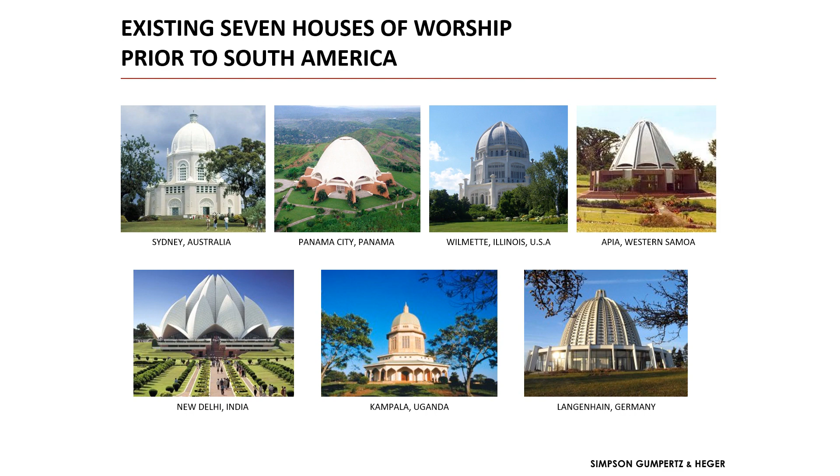You'll see some similarities. There are some design rules, if you will, largely around the fact that every temple needs to have 9 elements in its dome. The number 9 is very important to the Baha'i religion. I've heard numerous inconsistent stories about why, but let's just understand that 9 is very important. So all of the temples need to be dome-shaped at the center and have 9 elements around their circumference.

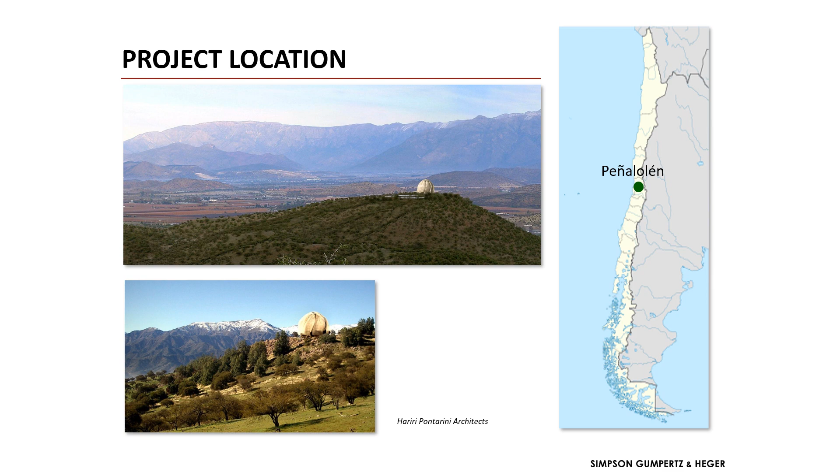This project is located outside the city of Santiago in a town called Peñalolén that is in the foothills of the Andes Mountains. There you see an early rendering of the project - a very challenging site. This is where the project and the story gets rather intriguing. The architect for this project, who was our client, is a firm out of Toronto called Hariri Pontarini.

They've grown since the notoriety from this project, but they were a relatively small firm when we started working with them in 2006. They're very academically oriented. Siamak Hariri, the principal designer, who leads Hariri Pontarini, is in fact a Baha'i.

There was an international design competition for this, 135 entries from over 80 countries. Siamak Hariri tells a really interesting story about the development of this. He wasn't even planning to put in a bid for the competition, but some of his fellow Baha'i and some of his friends urged him to put something in, and it was almost last minute that he decided to enter.

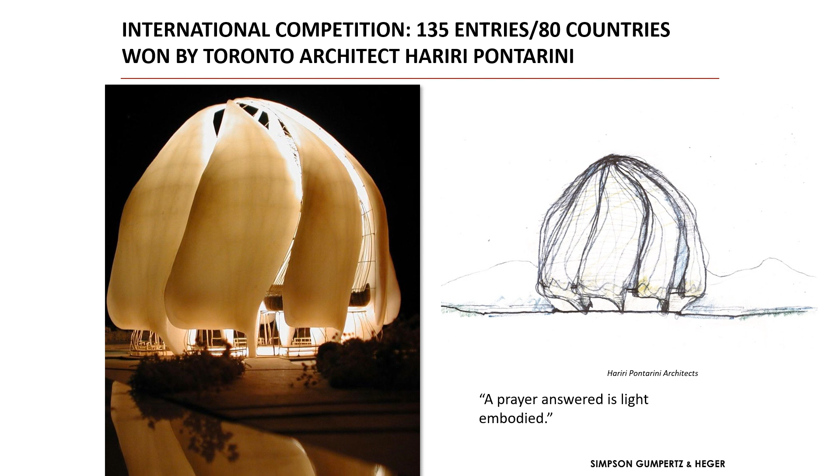But he came to us and asked if we could help, and I will tell you what that story was. The Baha'i do not, I understand,

celebrate in ordinary services like many of us may be familiar with, but gather in temples to pray together. Is that accurate also? Reasonably so? Okay, feel free to correct me anyway - I certainly don't want to misrepresent anything.

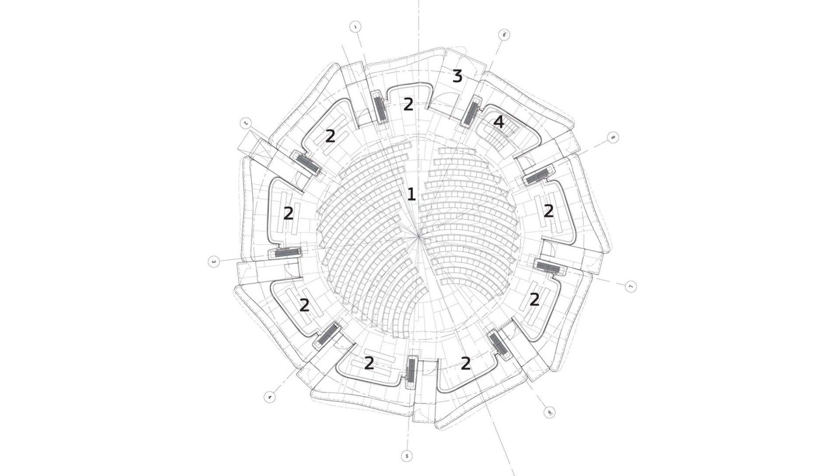This is actually a fairly intimate temple. It has seating for about 500 people. Its dimensions are about 33 meters across and an equal amount in height, if you will. And there you see the seating layout.

This was the project team. Again, the architect, Hariri Pontarini from Toronto, ourselves, Simpson Gumpertz and Heger. We have several offices and actually did work out of several of them on this, but primarily the work was done in Boston, where I work. Halcrow Yolles, who went through a transition and eventually was acquired by EXP over the course of this project, from Toronto - they were the structural engineer at the beginning of the project who worked with Hariri Pontarini.

Patricio Bertholet is from Santiago, an academic structural engineer, and his role was to ensure and convince the local authorities that while what we were doing was not strictly in line with the prescription of the code, it was there in terms of the intent of the code. So he helped us conform with local practice and convince the local authorities that we were on solid ground.

Eventually, as I will describe, the project was tendered to Gartner Steel and Glass, and Josef Gartner, a division of Gartner Steel and Glass, did a lot of the final design and engineering calculations. So there were four, at various times, structural engineers involved in the project.

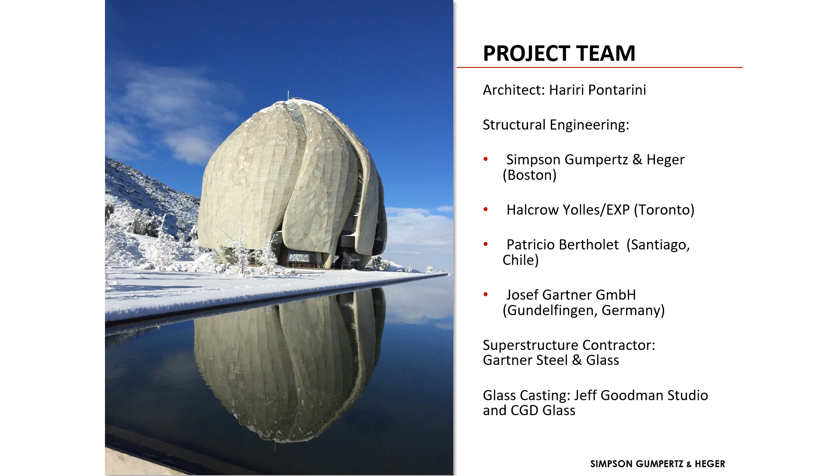This unusual glass, the cladding you see on the outside, is an unusual borosilicate glass that was actually developed for this project by an entity in Toronto - an artistic studio, Jeff Goodman's Studio, with fabrication by a Toronto group called CGD Glass.

Here is a schematic of the structure itself. You can see it has this spiral orientation. There are nine, remember, space trusses that we call petals, in a very organic motif here.

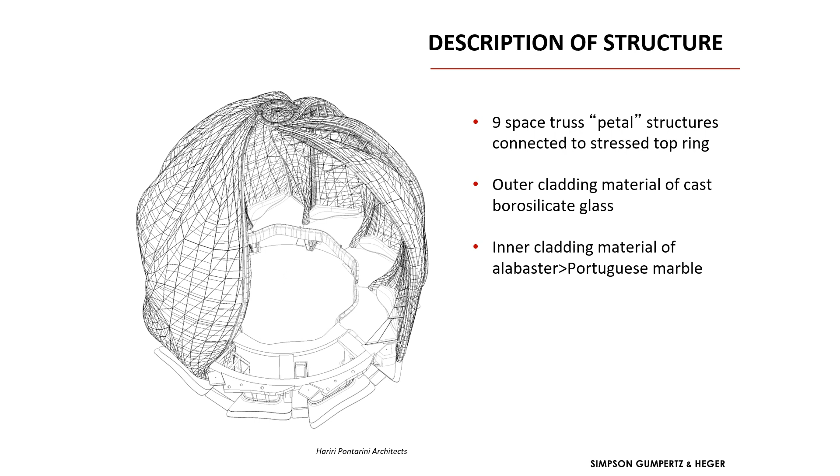These are clad on the outside with borosilicate glass, and on the inside with a thin stone, which started as alabaster and eventually became Portuguese marble over the course of the project - I'll describe that. I'm going to back up a bit because I meant to talk about the architect's vision. The primary vision that Siamak Hariri was going for was that this was to be a temple of light.

And the light was to be the inspiration for the project. You can see even from this physical model here, lit interiorly, that it has this warm, glowing feeling, if you will. This was really important to him. Similarly, during the daytime, the sunlight would also permeate and give a warm splendor glow on the inside. So the cladding material and the use of light, this semi-translucent material, was really important.

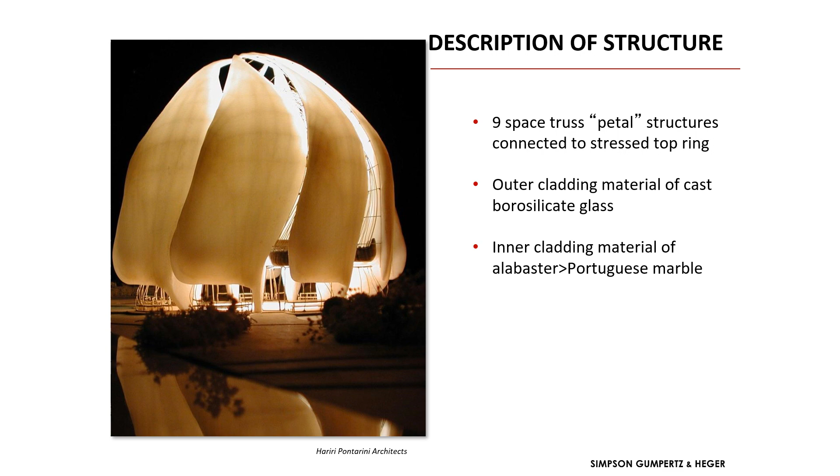The selection of the stone and the selection of the particular glass were critical to Siamak's vision. Siamak also wanted for the temple to have an organic quality, and the petals are meant to evoke petals of a flower or a tree. You can even see here, more so in the finished structure, part of the structure expressed through the petals, meant to evoke veins of a leaf. These were important aesthetic considerations.

These were some of the design challenges that the whole team faced here. You've seen it's a very complex structure. Each one of those 9 petals is identical, but within them there are hundreds and even thousands of individual elements. Every strut, every structural element, every piece of glass, every piece of stone within a leaf is different geometry. Very little repetition, no repetition within the leaves themselves.

The architect wanted very high precision in the fit-out. The joints between the glass and stone elements had to be quite narrow, and of a consistent dimension. The materials had to appear to be, and in fact need to be, a very high quality material.

One of the big design challenges from a structural point of view is that the project site is in an area of very high seismic demand. If you're familiar with seismicity at all, the zero period acceleration, which has a 10% in 50-year chance of occurrence, is 0.41 G. We relate that in the United States to California levels of seismicity. So this is a very high seismic zone.

The alabaster that the architect had chosen really had no track record in a thin cladding application. It had rather variable strength, and some veining in it, beautiful, but the veining produced variable structural properties. There are no industry standard specifications for designing in alabaster as you might find for granite, marble, or more traditional thin stone applications. To compound all of that, the structural properties of alabaster can degrade under high temperature or high levels of moisture, particularly under prolonged combinations of both. So not an ideal material, but the architect was absolutely in love with it.

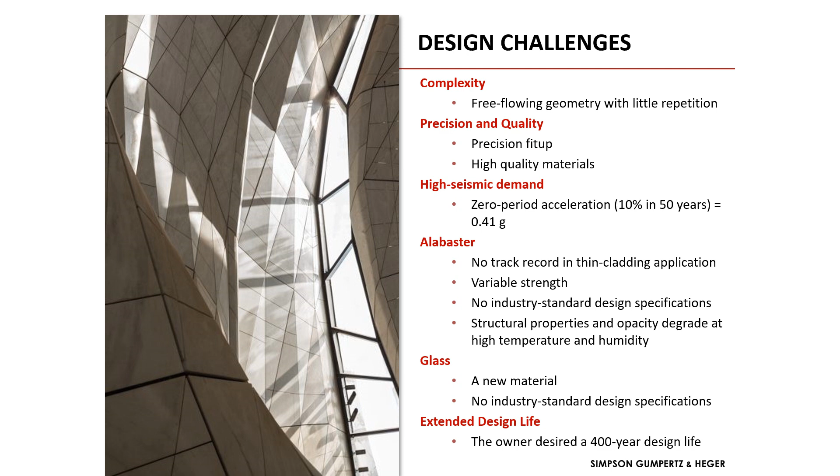I went to school on the West Coast to learn seismic engineering, which is probably why I got drawn into this project, even though I work and live on the East Coast today. And this project is attempting to do everything my professors in college told us not to do. Heavy, brittle materials in a high seismic zone are known to be a no-no. So how do we make this work, help the architect meet his design vision, and really do it in a responsibly safe and reliable way? That was the major challenge for structural engineering on this.

A little bit more on the skin and cladding. The outer glass is 32 millimeters thick. It's made of borosilicate glass, which is Pyrex — the stuff we make beakers and test tubes out of. Pyrex is actually extremely strong in its purest form, stronger than ordinary soda lime float glass, but it's expensive.

But to get the texture and appearance the architect was looking for, this glass was made by taking nodules of Pyrex — think of a piece of Pyrex maybe the size of your finger or thumb — broken up and put in a mold in an oven, heated up, then fused together, melted and fused together, but fused in a way that you could see the fusion lines. This was the texture the architect was going for. I've described the alabaster.

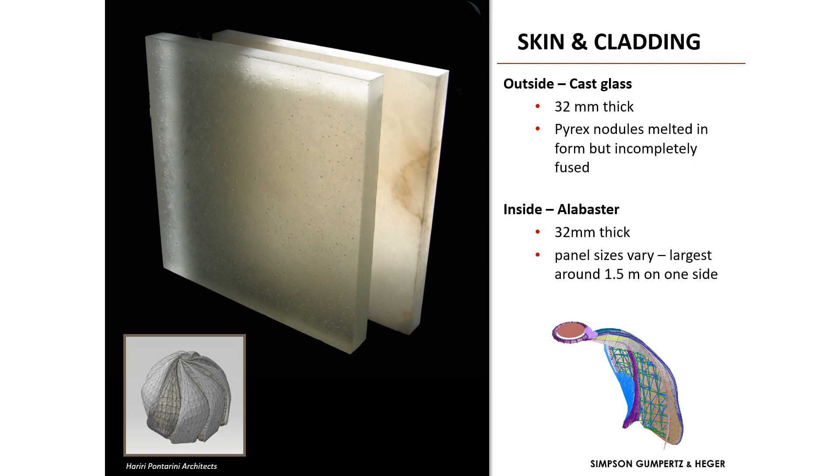That also is to be 32 millimeters thick. The panel sizes vary, but the largest are around 1.5 meters on one side, mostly triangular and trapezoidal shapes.

I talked about the alabaster and its qualities and its challenges, if you will. Mostly we were concerned about degradation over high temperatures and high levels of humidity, and what we could do about that.

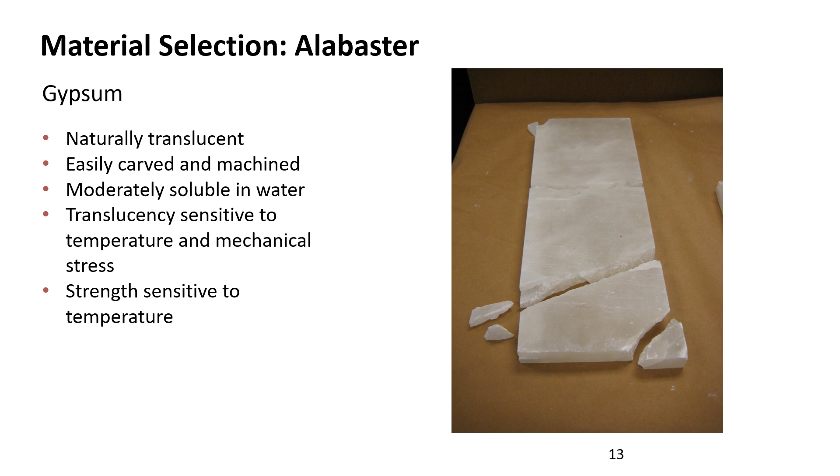One of the reasons we were awarded this structure is that our firm, Simpson, Gumpertz & Heger, has some unusual capabilities for a structural engineering firm, one of which is that we have a very extensive structural and material test lab.

So we were able to bring these new or unusual materials, the alabaster and the glass, into our laboratory, apply a lot of torture testing that we invented for that purpose, and understand the structural properties and durability of these materials. So you see here some testing of the alabaster.

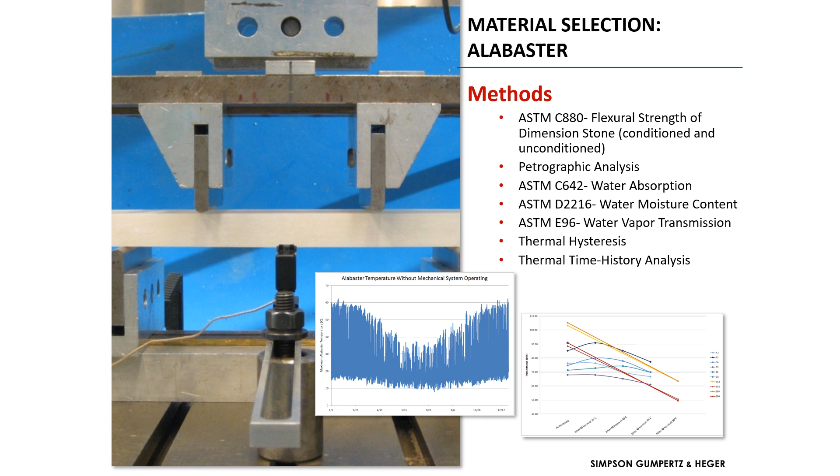And it meant, in effect—in some measure it's a slight exaggeration to say—they had to keep the air conditioning on all the time in order for the stone not to degrade. That was proven to be impractical. I'll return to that in a moment.

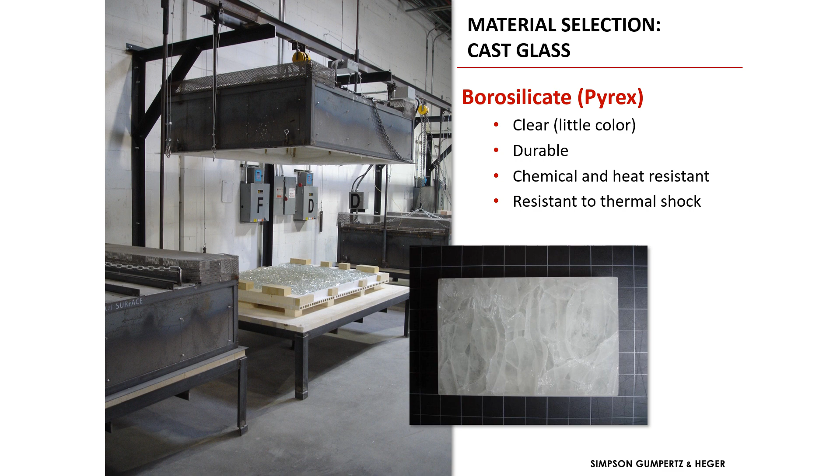Here is the borosilicate glass. You can see the broken elements going into the oven, and you can get a sense for the texture in the lower right figure, which is exactly what the architect was going for.

What we were most concerned about with the borosilicate glass was not its inherent strength or the reliability of the basic material, but how good and durable and strong the fusion lines would be between the various nodules. So we used some industry standard tests and made up some more that were even more severe, to see if we could degrade those bond lines through freeze-thaw or thermal shocking.

The bottom line is that the material was extremely tough. We couldn't damage it at all, short of really dropping it off the top of the Empire State Building or something. It turned out to be very strong.

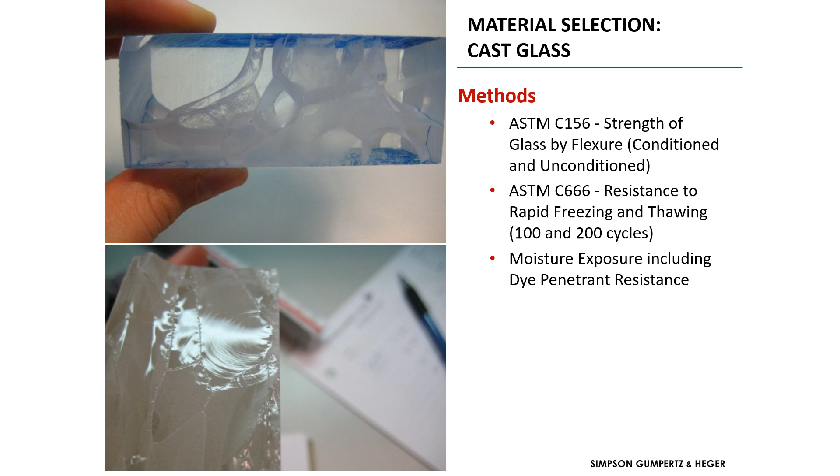The base isolation was used—I'm seeing some nodding heads here. We used friction pendulum isolators in the horizontal direction. We didn't isolate for vertical. This was about 10 years ago, so vertical isolation was not as prominent as it is today. But we achieved very good isolation in the horizontal direction.

So it turns out that the vertical accelerations—and there were significant vertical accelerations because we're fairly near source here—wound up dominating the design.

And the interesting part of the structural behavior when we did the dynamic analysis is because of the spiral geometry, when you accelerate the structure up and down, you actually get this twisting effect.

Did you ever have Jiffy Pop popcorn over here? No. This is a U.S. thing. All right, sorry, it won't mean anything to you. I won't even go there, it's too long an explanation. I can do it over Q&A if you want to.

We said it behaved like a Jiffy Pop popcorn popper as it went up and down and spiraled, if you will. So we got not only vertical accelerations, but lateral from the vertical acceleration.

So the structure is built on a concrete podium, and you'll see some of that in construction later. And just at the level of the base isolators there is the top—think of a round open-top table with base isolators on it. And then those structural leaves are sitting on top of the base isolators.

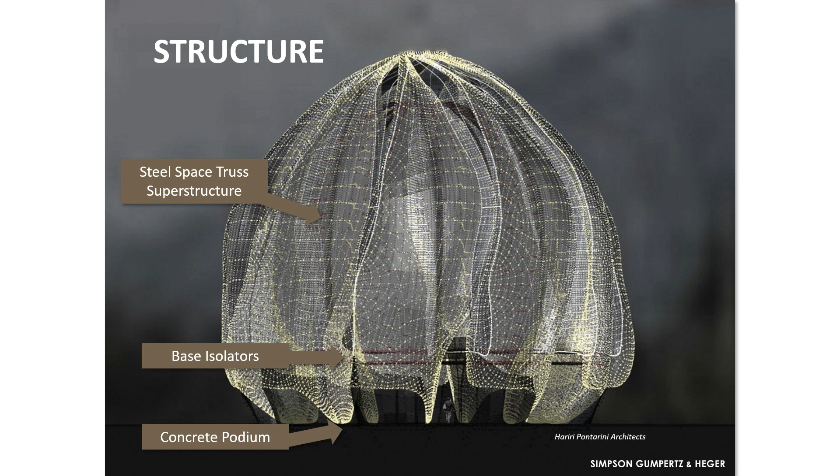Because we had really no design standards for the alabaster or the glass, we couldn't go back to sort of classic prescriptive design where we're working with characteristic strengths and factors of safety.

And we have all of these pieces of stone and glass overhead. We were very concerned about falling potential. And so we went back to first principles of performance-based design, which I think is more common in the US for seismic design now than it is in other parts of the world. But in the US, performance-based seismic design was really developing as we were going through this, and we had people who were involved in that development of that approach to engineering.

Basically, in performance-based design, you're choosing target levels of performance and target levels of reliability. So you're looking at the variability of load and resistance and the probability of failure being where those two overlap. So we took all of our laboratory testing to understand the variability in load and the resistance. We have a lot of data from industry about the variability of the seismic loads, for example.

And we adopted, based on then-developing measures, criteria for performance-based seismic design—a criterion that there should be no more than a 10% probability of failure of any single panel, that any single panel would drop under an earthquake with a 10% probability under the design level event. That was our goal. Anything more than that would be unacceptable in terms of risk to life.

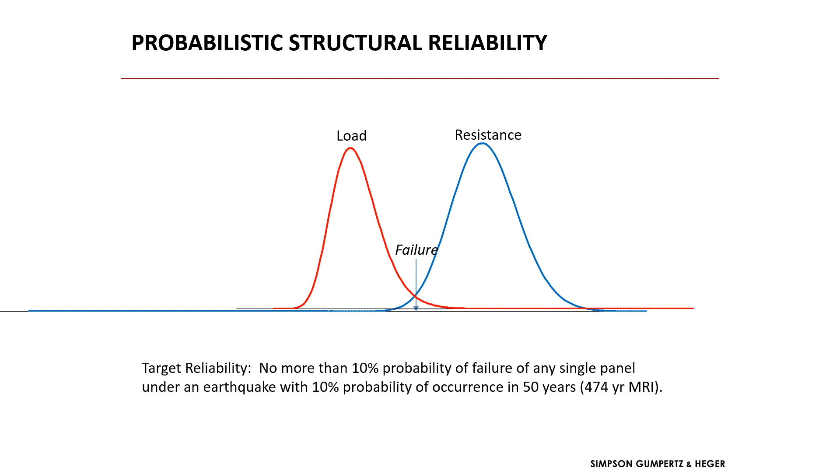And we went through a lot of analysis, and this was a tremendous amount of number crunching where we actually calculated the probability of failure under the seismic events of every piece of stone and glass and element in the structure—thousands and thousands. So we're writing scripts and crunching gigabytes and gigabytes of data to do this calculation. And this just shows a piece of the spreadsheet that shows the output.

The really interesting and satisfying thing as we did all of the calculations was something really interesting came out of this as a design tool. The original calculations that we had for stone and glass failure turned out to be over our limit of reliability—that is, we weren't beating our target.

But we were able to go into the structure because we had the probability of failure calculated for every piece of glass and stone. We could see what parts of the structure were contributing overly to the probability of failure, and say we've got a problem with that part of the structure, we need to take care of it.

So most of this involved looking at parts of the structure that were vibrating or accelerating too much, going back to the architect and saying we need to make some changes to stiffen up the leaf in this area and that area in order to bring the accelerations into line, because there was a really small percentage of elements leading disproportionately to the probability of failure. So it was a really interesting design tool from that perspective.

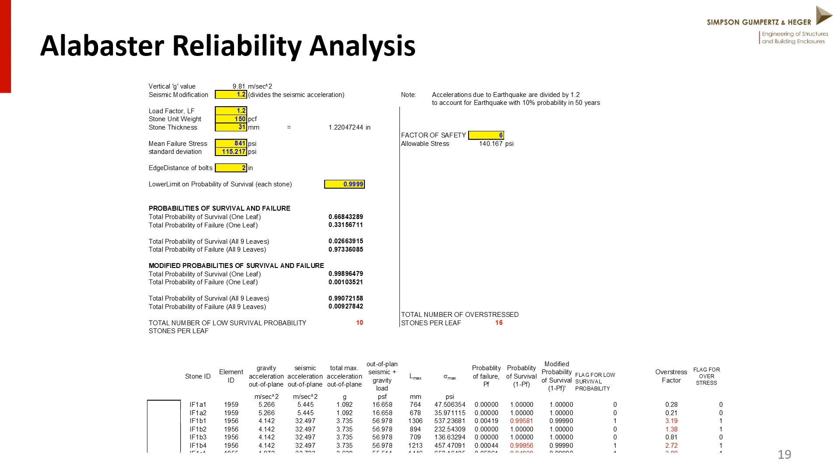Once we did all of that, our back check was to go back and see what are the inherent safety factors we're dealing with in the most highly stressed structures. Most of the stone and glass elements came in the range of 3 to 6, which is actually pretty reasonable for most masonry elements. So we took some measure of satisfaction from that.

But in the end, we needed to move away from the alabaster, and there were several reasons for that. The dominant one was that having the air conditioning on all the time was just not sustainable or reasonable. We were looking at backup systems, what would happen if the air conditioning went down for 48 hours. As we went through this project—remember we started in 2006 with the engineering—the imperative for sustainability was growing. It was becoming very important to the owner, and eventually it became impractical.

The other problems with the alabaster were that Santiago actually has a relatively aggressive environment. There's a lot of smoke and air pollution there, which we thought would require a lot of cleaning for the alabaster. To do that with a stone that's relatively soluble is not very practical. And also there was a limited quarry capacity for this particular stone.

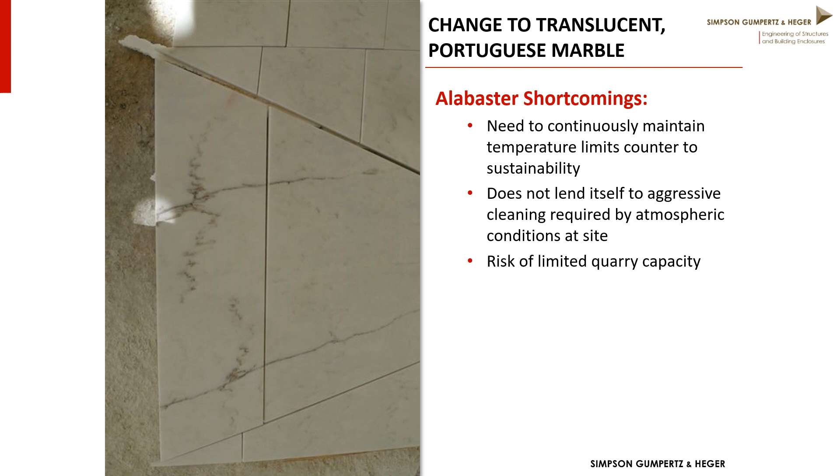So with all of these piling up, between the structural engineer beating up on the architect on one side and the owner beating up on the other because of the sustainability problems, the architect had to surrender his desire for the alabaster. We were able to find a Portuguese marble that was very close in appearance and didn't have all of those problems. So we did another series of testing, reran the reliability calculations for the Portuguese marble, and made that change.

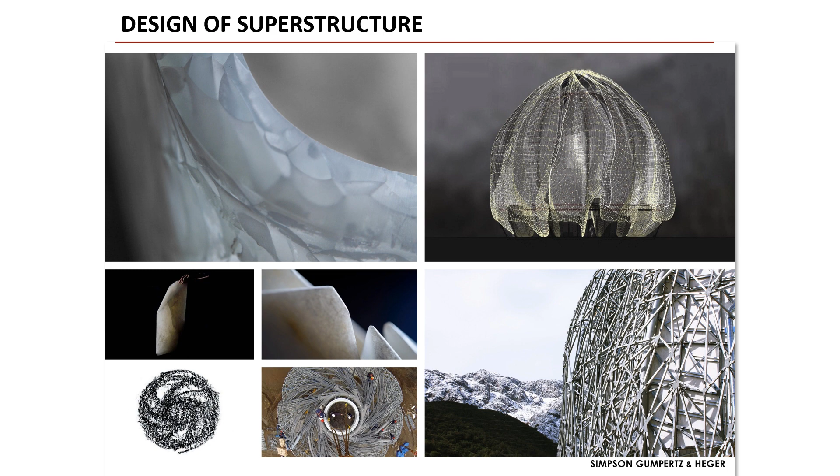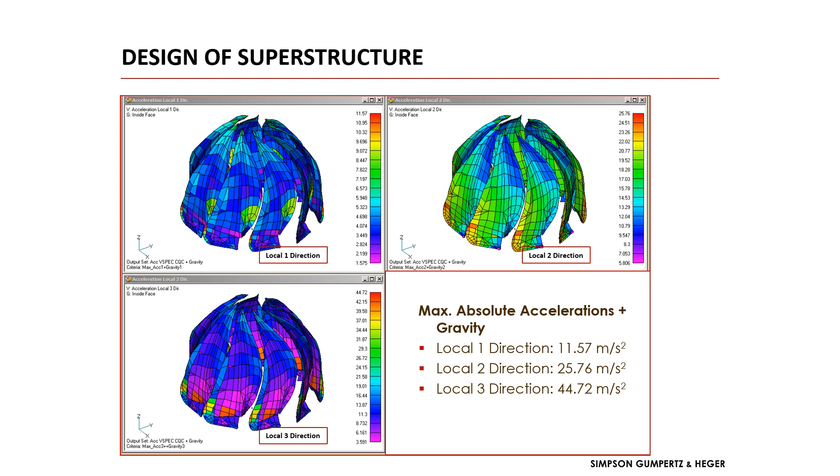We were able to bring in people we've worked with on different types of structures. We have a group in our engineering mechanics division at SGH that does a lot of work on structures like this—very precision, generally scientific and defense radio telescopes and radar antennas. Although the structure doesn't look a lot like the Baha'i structure, the analytical techniques are very similar and translate over. So we brought those folks in to help us with this.

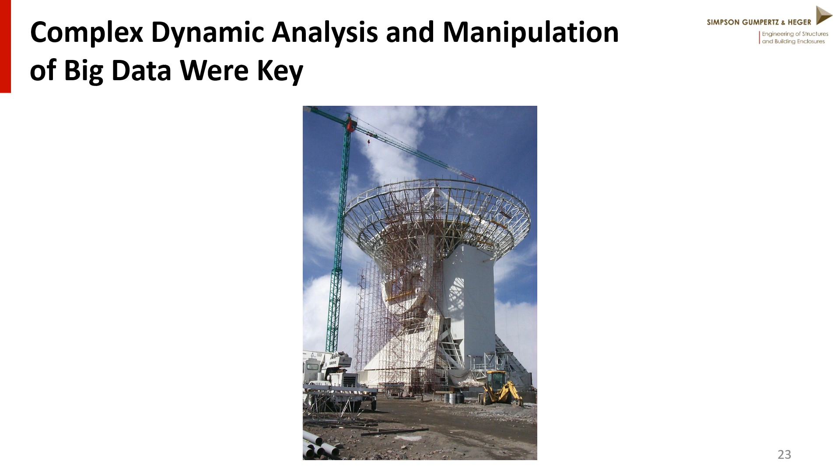We also had to do a lot of work with tolerances and movements between different panels because we had very tight joints. There are no expansion joints anywhere in the facade, so we had to have facilities to take up all of the structural movements between each piece of stone and each piece of glass. We calculated the gap changes during all of the structural movements as well.

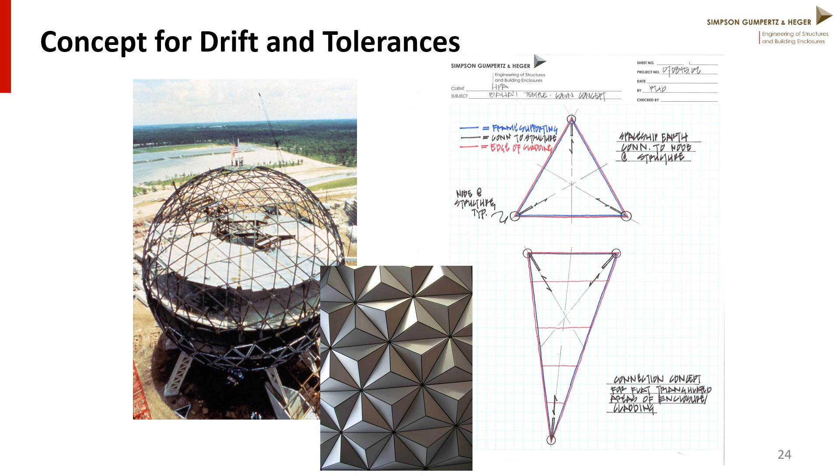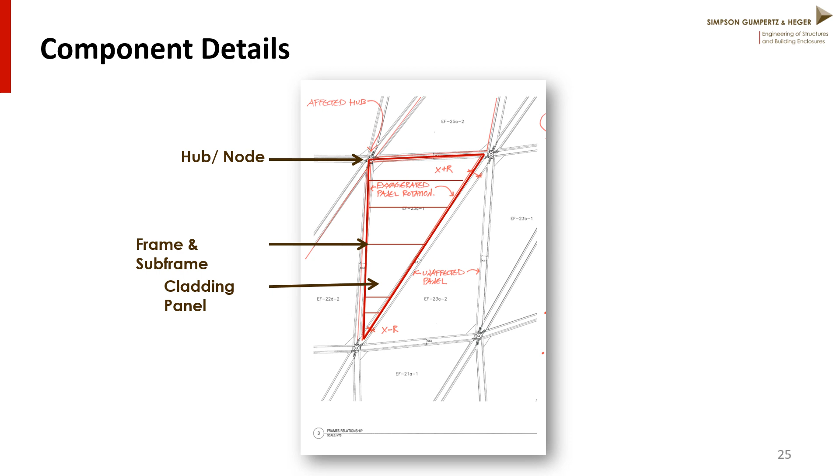So to go into a little more detail here, the basic geometry of the panels for the stone and glass matched the geometry of the underlying structure. We had a structural frame, and then subframes with components for glass and stone that mounted either on the outside or the inside of the structural frame.

This again is just the analyses for drift tolerances. We had to figure out how to mount these panels so they could move but weren't overly constrained. There's a lot of detail here I won't have the opportunity to really go into, but we used different techniques to support the panels in a statically determinate fashion while still allowing them to be stable.

Let me see if I can get the pointer going here—yes. This is an alignment tab that comes out from the base of the structure, and we have adjustable screw stops on each side that could limit the movement of the joint from side to side. So you're adjusting the permissible movement and the position of the gap between panels by adjusting these screws.

And then in terms of fixity along the direction of one of the frames, we had a similar kind of arrangement with screw adjusters that would back up against a stop here.

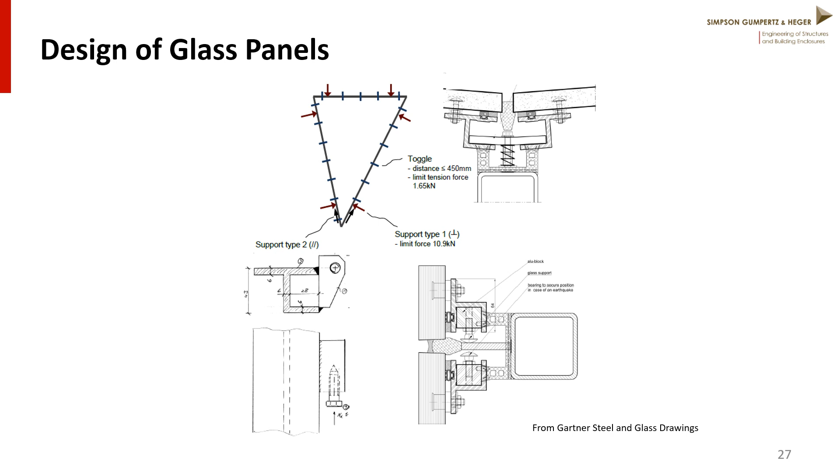So we were able to align in the field the position, and there were different alignment techniques depending on where you were on the structure and how the gravity load and other loads were being carried.

We're going into some of the design. Here are the design of the glass panels. This just shows you the glass with an aluminum subframe, and these are some of those lateral screw stops that allow for the joint alignment. This is one of the stops that these go against.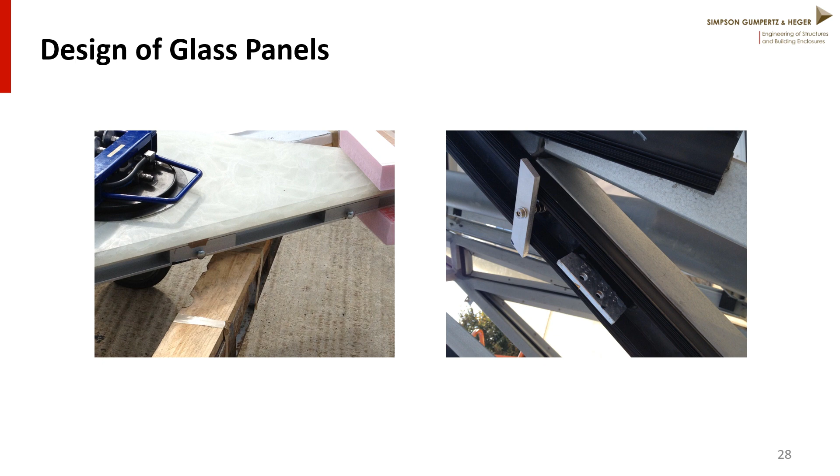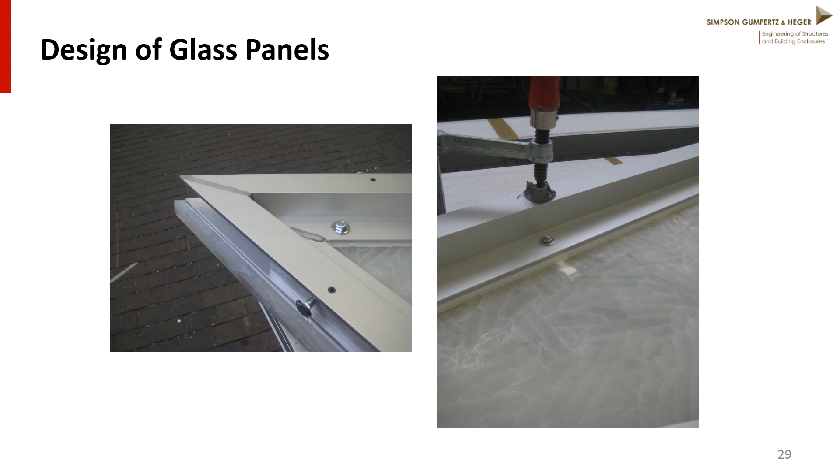Here you see the underside. All of the glass panels and the stone panels were fabricated in Europe and sent over.

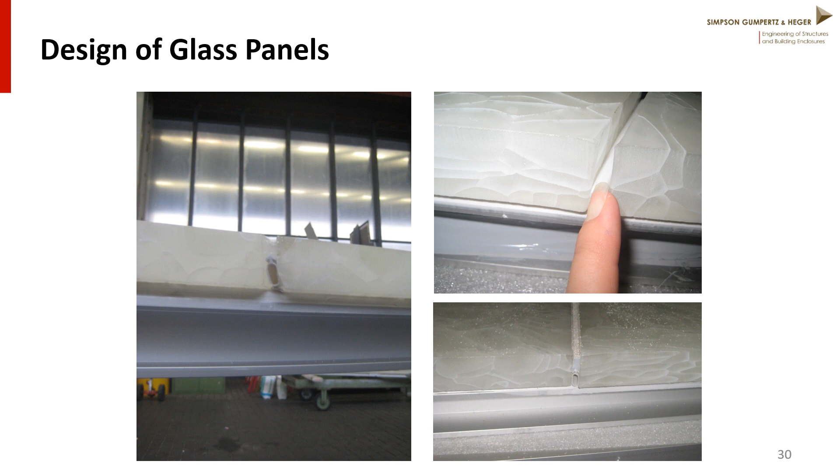More details here showing some of the waterproofing details. All of the waterproofing joints had backup associated with them.

This one detail here, I don't think you can really understand all the details from the back of the room, but we spent more time on this one detail than any detail in the project. Literally hundreds and hundreds of hours went into this, because what we're showing here is the relationship and the attachment of the basic structural frame, which is this tubular element down here, attaching the glass on the outside.

So here we have the demands of the structural capacity, adjustment for tolerances, and keeping a weather enclosure at the same time. On top of all of that, the architect would not permit the appearance of a fastener on the outside, so we had to come up with some kind of blind fastening system. We had all of these conflicting demands, and how do you solve that?

One thing we decided on early, in terms of sequencing, is that the stone panels would go on from the inside first, and they could be back fastened by application from the outside. But the real challenge was putting the glass panels on in a way where no fasteners would appear, while at the same time having waterproof joints between the panels and being able to adjust for all of these tolerances.

So some of the elements here that you see - you start with the structural frame. This U-shaped element is a rubber-shaped gutter, which is a water management channel, if you will, that will take backup water in the event that the primary seal between the panel fails. That water can be collected in this gutter, and there's a network of joinery in these gutters that take the water on the outside.

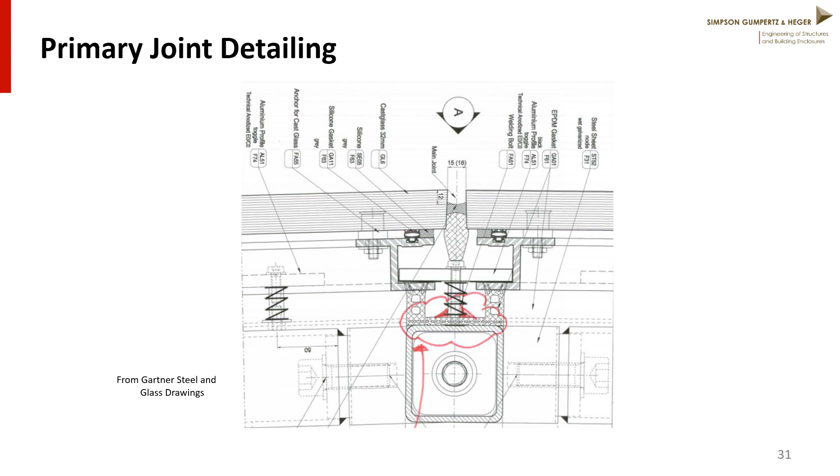So it's all blind fastening done from the outside, and you need to clamp it a certain amount so that you compress this gasket system, but not over-compress it. Anyway, that's the short version of the explanation of this complicated joint. More engineering went into this than any part of the project, but it works.

So I'm going to go to some construction here. We're looking at the same sort of detail. This black here is the U-shaped neoprene gutter system, and these are the toggle bars that I just mentioned. Probably a lot easier to understand from this view - you see they're aligned along the axis, ready to accept panels.

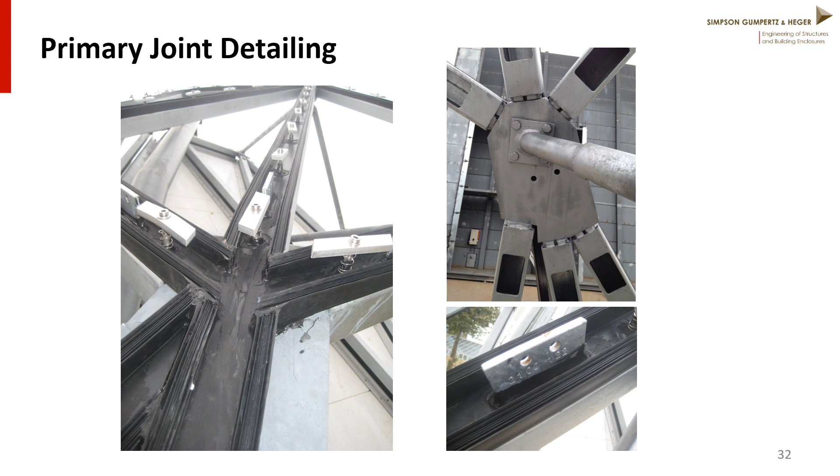Now it comes to who's going to build this thing. This is really a challenge because it's a very, very high precision structure in an area where generally the degree of sophistication in the construction labor is not that high, and an owner who wants a very high degree of reliability. There was an imperative on the owner's side to be able to use local labor in the construction, even though we recognized they couldn't do all of it.

So we went on a search for the owner and determined that there were probably 3 or 4 contractors in the world that we really felt with a high degree of reliability could put this project together. I won't mention who the other ones are, but after a lot of interviewing, we settled on Gartner in Germany. You may know them. They're a subsidiary of Permasteelisa.

They've done a lot of really fancy cladding work, excellent engineering and quality control. After a lot of negotiation, Gartner was selected for the project. We did agree that the delivery system would be basically design-build. That is, we would tender the design over to them, but they had to do the final design calculations and take complete integrated responsibility for the design and construction of the structure. And that worked very well.

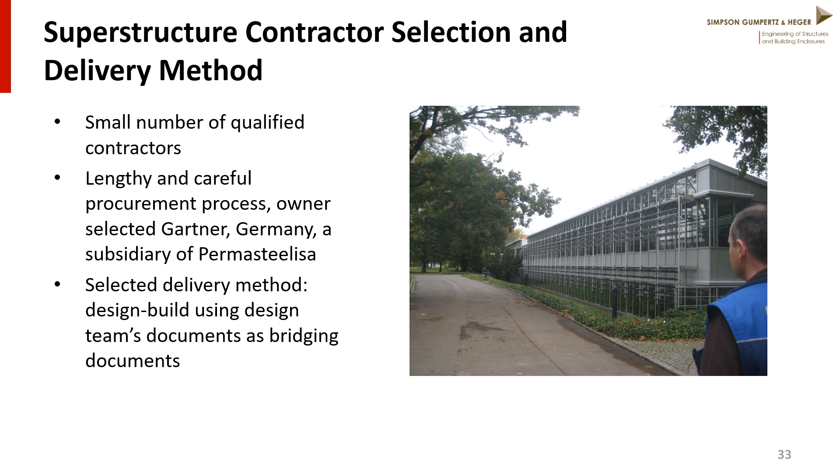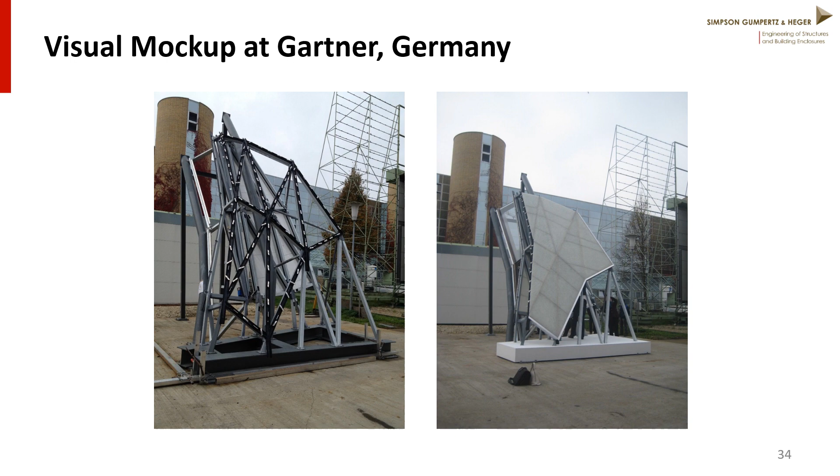Here we're doing a mock-up, a visual mock-up at Gartner's plant in Germany. This is the largest water testing facility I've ever seen. What you're seeing here is a very large mock-up of the panel system, and this grillage is a bunch of spray racks that we used for testing. We actually breached or cut the primary seal in the water testing to make sure that the backup seal was reliable enough to do the job.

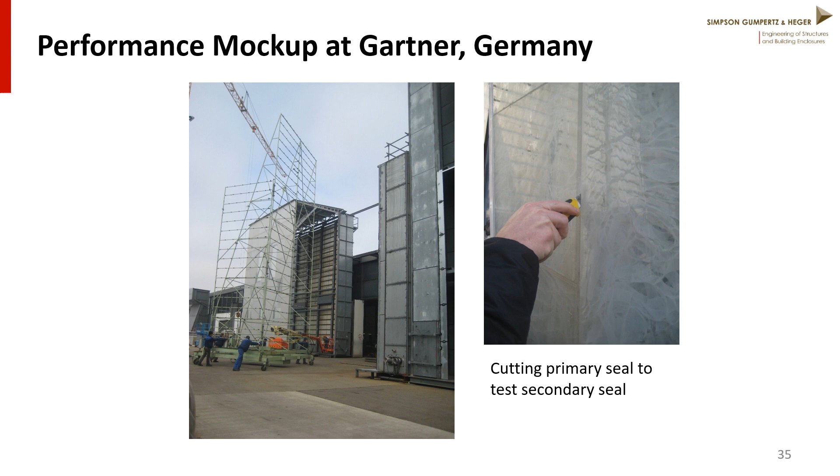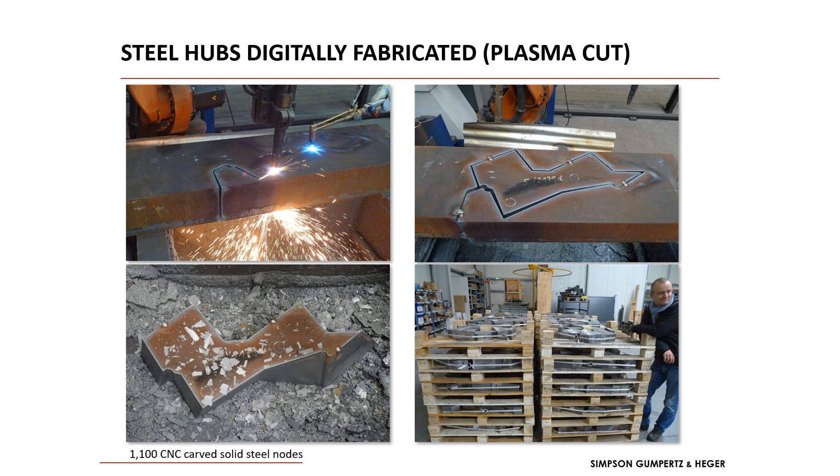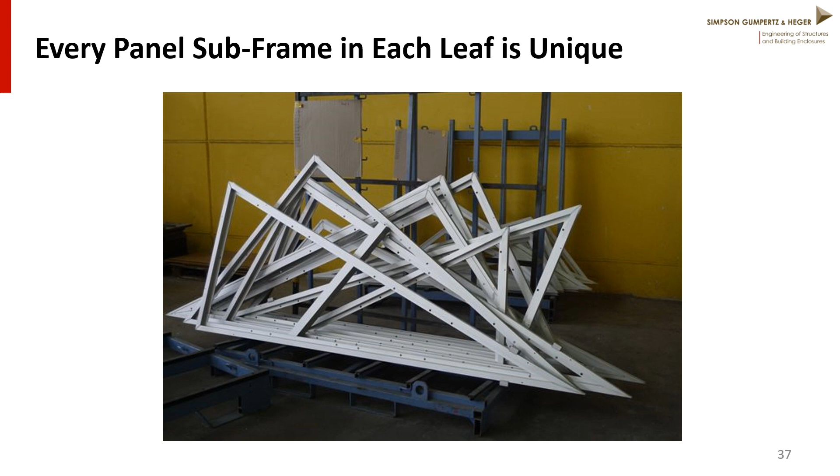Every component of the structure was digitally fabricated. These are plasma cut steel nodes for the joints. Every piece of aluminum frame, stone, and glass was digitally fabricated here. Here you're seeing a lot of the glass elements with the undercut anchors on them ready to go on the frame, and glass frames becoming assembled.

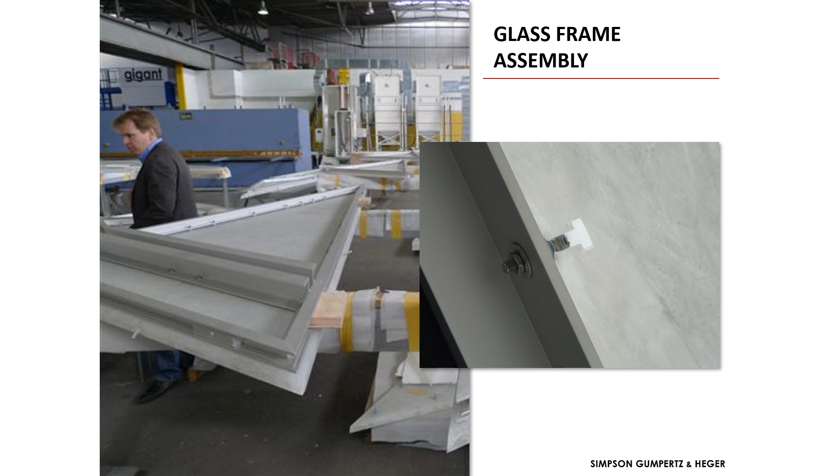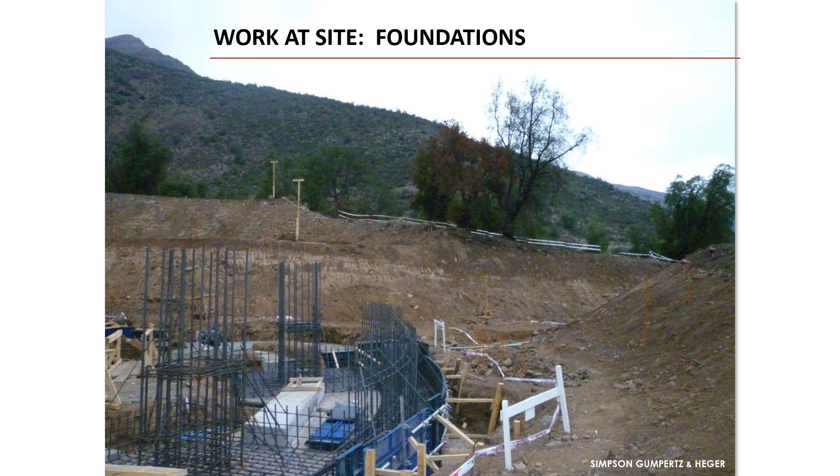Construction on the site started around 2012. It was completed in 2016. The structure itself actually went up pretty fast, but now you're seeing site work of the foundation and steel going up, rebar for the podium. There was a central tower that they erected to start the structural steel erection.

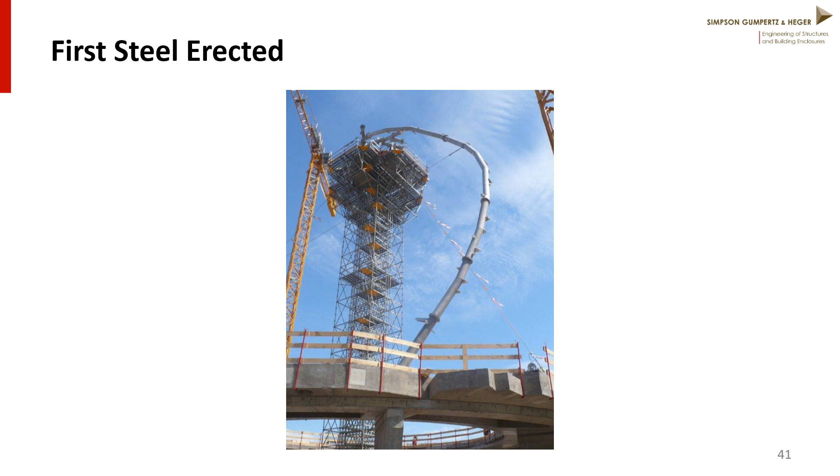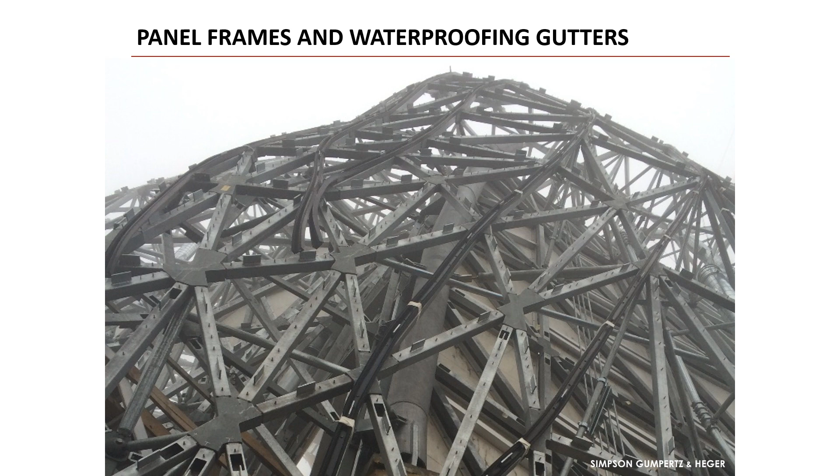You see the steel going up here. This is a good shot really showing the complexity of the structural steel. A lot of the space truss elements are now in place, the rubber gasketing going on top, and we're getting ready to accept panels.

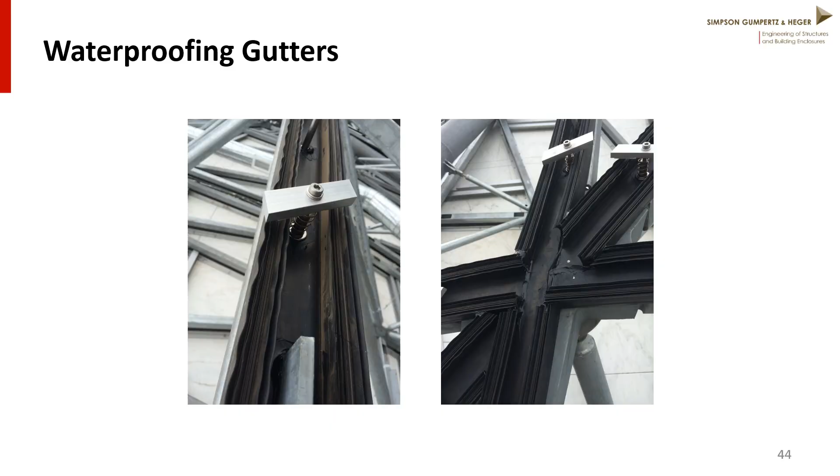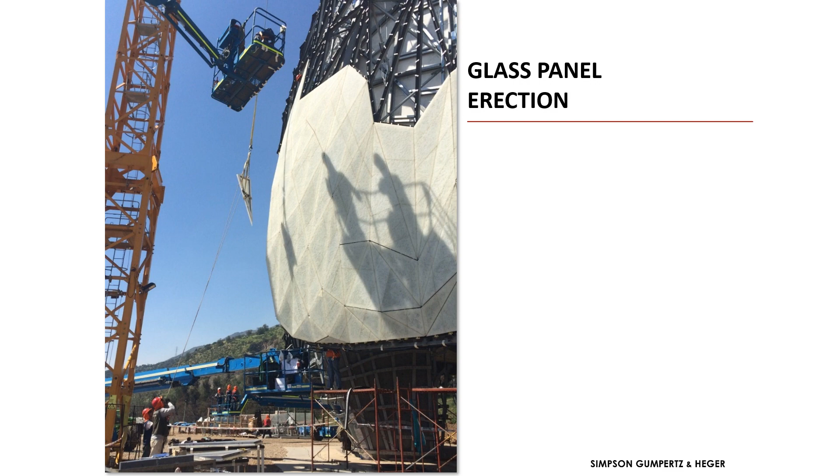Some of the marble panels going up on the inside first. There's a view from the podium level. And we're starting to erect glass panels for the final enclosure on the outside here. Really complex geometry - you can see the variation in all of these sizes.

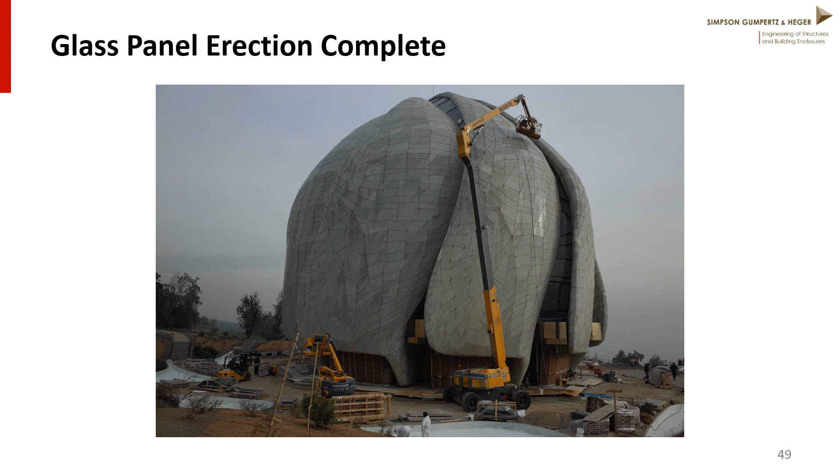One of the design objectives the architect had was that he wanted a worshiper inside the temple to be able to stand at the middle and look up through the oculus and have the impression that you were looking through a canopy of leaves in a tree up towards the heaven. And he was very thrilled with the result. That is the oculus of the sphere, of the temple.

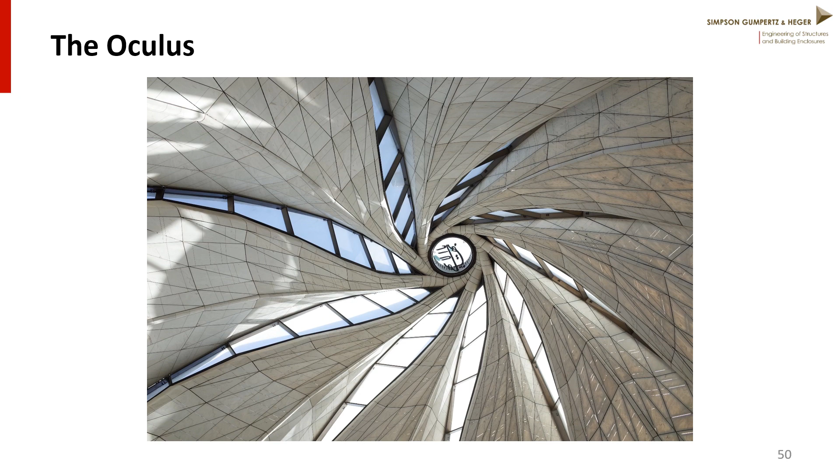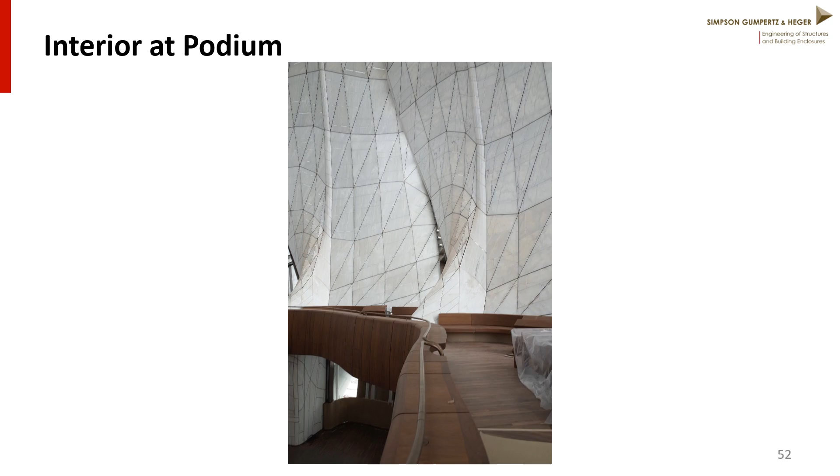This is a view near completion down at the worship level, which is at the podium. Some of the details around the podium. It's really a fantastically beautiful structure. There it is complete - you can just see the city of Santiago down below here. There's some stunning views, and there's a reflecting pool there.

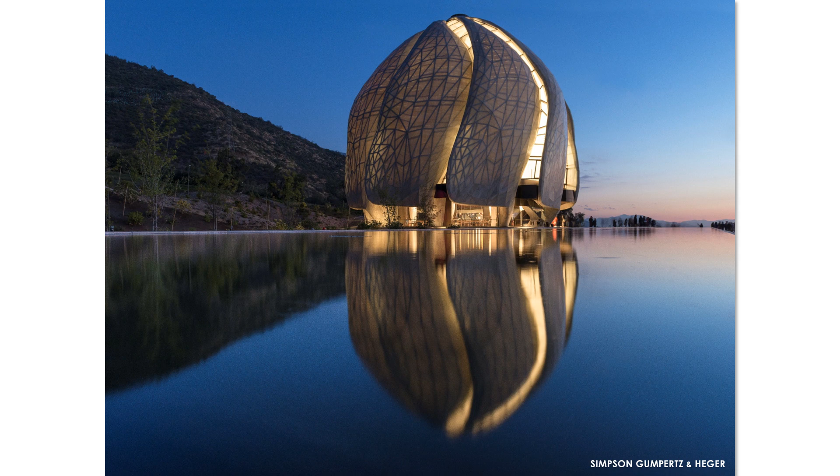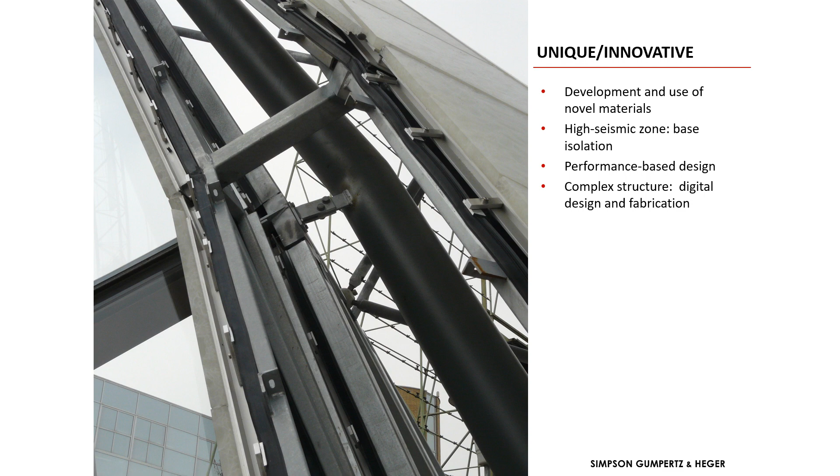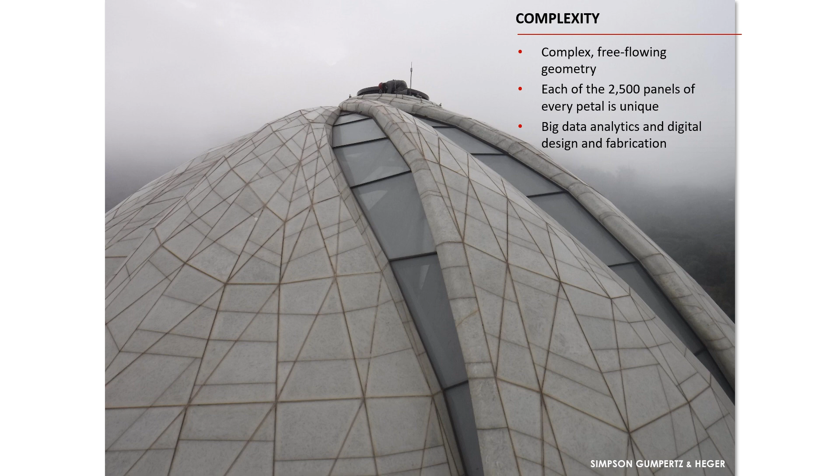So these are some of the challenges that we faced: really novel materials in a high seismic zone that we solved using performance-based design, a lot of digital design and fabrication. There are 2,500 panels on each of those petals, and each one is unique. A lot of really heavy data analysis. We couldn't have done this project 20 years ago - there just was not the computational horsepower or the digital fabrication to do what we were able to do here.

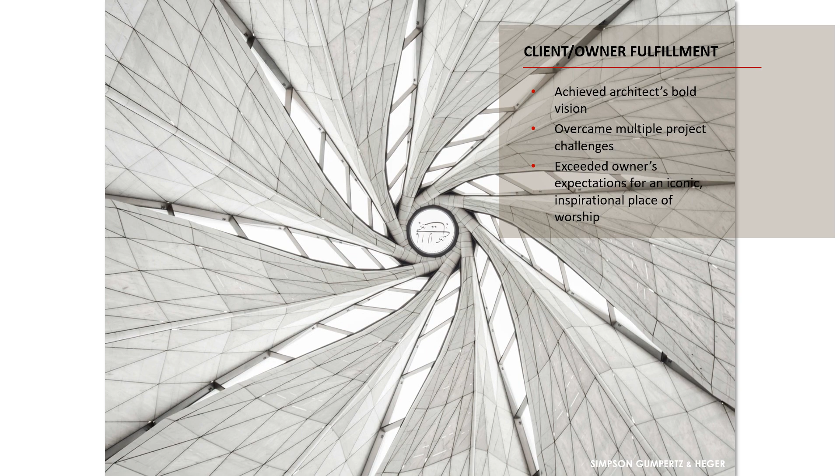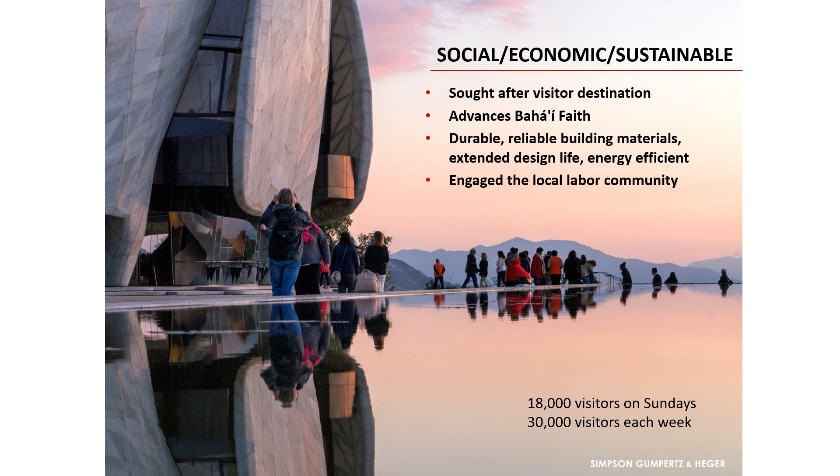The owner, both the architect and the owner, were really, really pleased with the result. And this temple actually has become a destination point for the city of Santiago. They have averaged, in the first couple of years now, 30,000 visitors each week to the temple. So people are actually going to Santiago to come and see not only Bahá'í but others. It's been really, really a tremendous success.